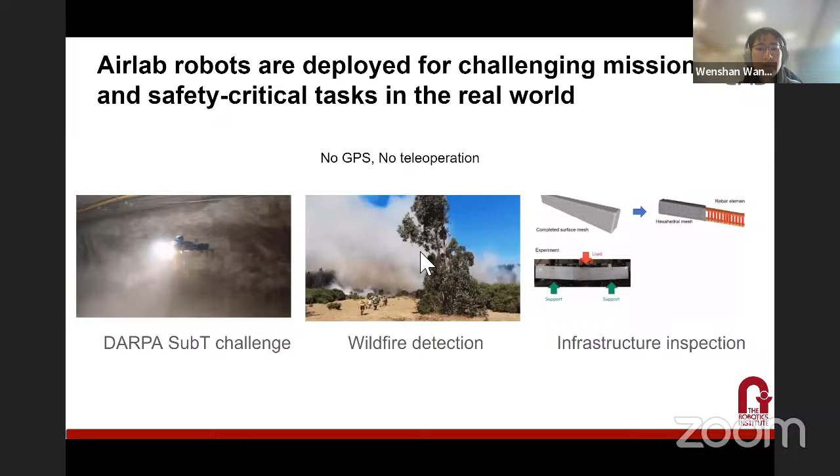We developed field prototypes in very challenging environments without GPS guidance and without teleoperation. These cover different applications like subterranean search and rescue, wildfire detection and prediction, and infrastructure inspection. We often focus on safety-critical tasks in those very challenging environments.

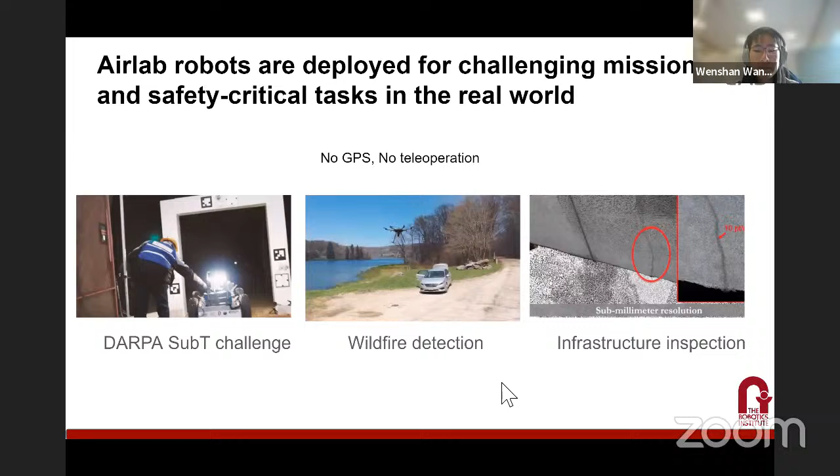So we are very experienced in designing, integrating, and developing robust prototypes for ground and aerial robotics. Here are some platforms we developed and have been working with. You can see there's a lot of diverse robots, like different types and sizes of drones, and ground vehicles also in a variety of sizes.

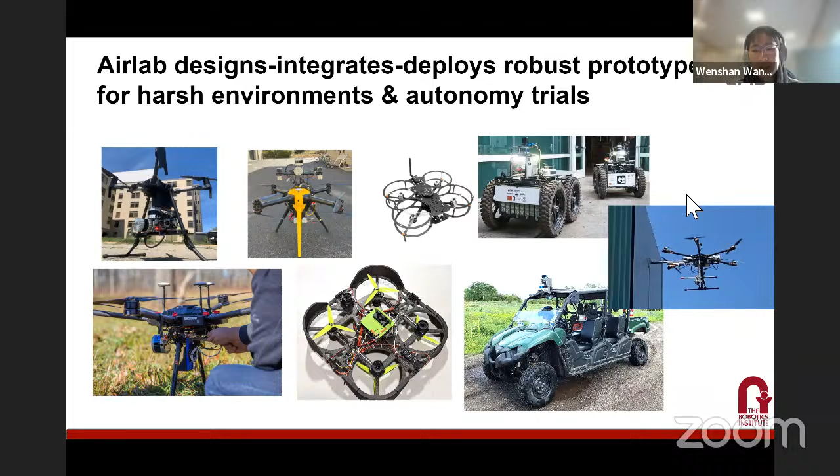We also focus a lot on real world tests, so we have very large testing sites. As shown on the left side is a Gascola testing site, which is a few kilometers in diameter, with off-road settings and all kinds of challenging terrains. We are testing and developing the off-road driving system in this testing site.

On the right side, it's an abandoned hospital environment, which has a combination of indoor and outdoor scenes. We test a lot of drones and legged robots in these environments.

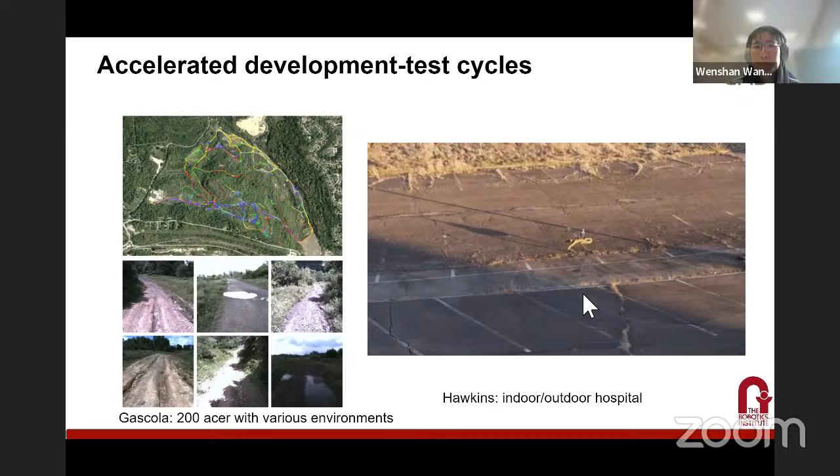Here I highlighted a few projects we are working on. I'll show more videos in the next slides.

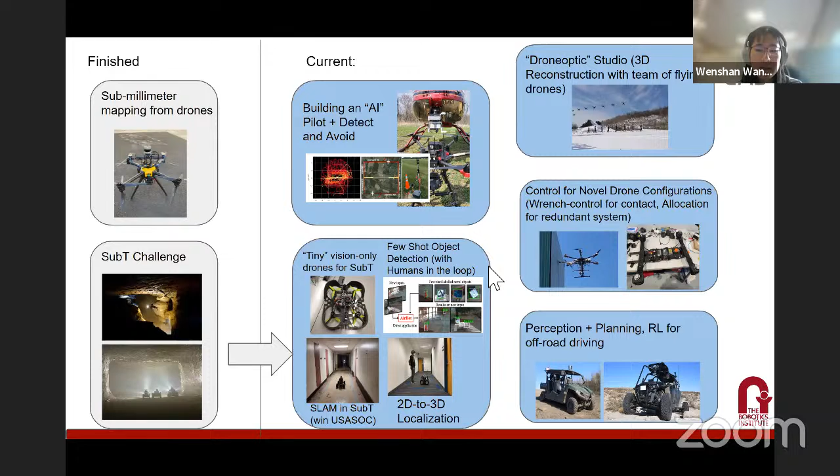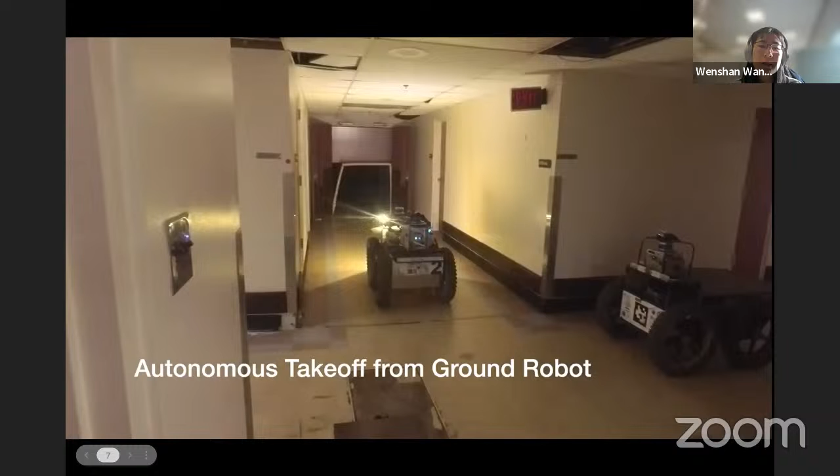Professor Sebastian Scherer led the DARPA SubT challenge a few years ago. Our team Explorer won first and second place in a couple of competitions. Here shows the video of the competition. The goal is to search for a few predefined objects like a human, a cell phone, and a backpack in this complex environment.

We'll send a team of heterogeneous robots - here we have a drone and a ground robot. The drone just takes off from the ground robot and explores the environment collaboratively with the ground robot.

In these environments, it's typically very challenging in terms of perception and planning. Here you see when the drone is flying, it kicks off a lot of dust in the environment, so it's pretty challenging for LiDAR localization or visual localization in this dusty environment.

Also, how to collaborate multiple robots efficiently so they can explore different areas given their own capability is a very challenging problem. For example, we want the drone to explore challenging environments like vertical spaces that cannot be reached by the ground robot.

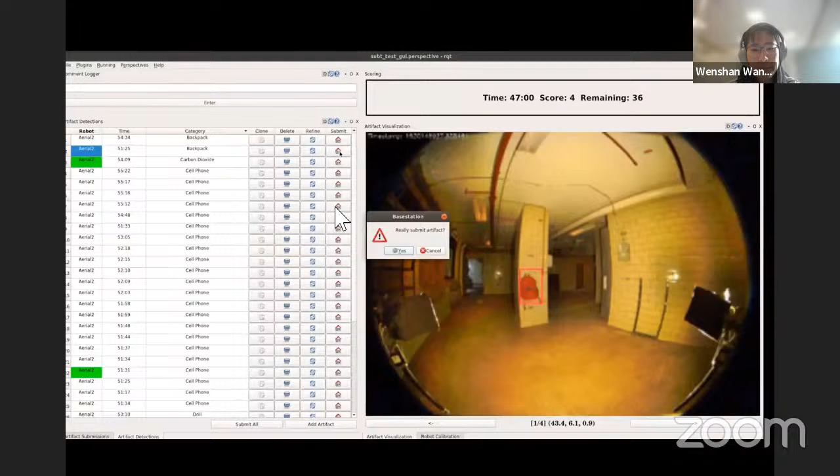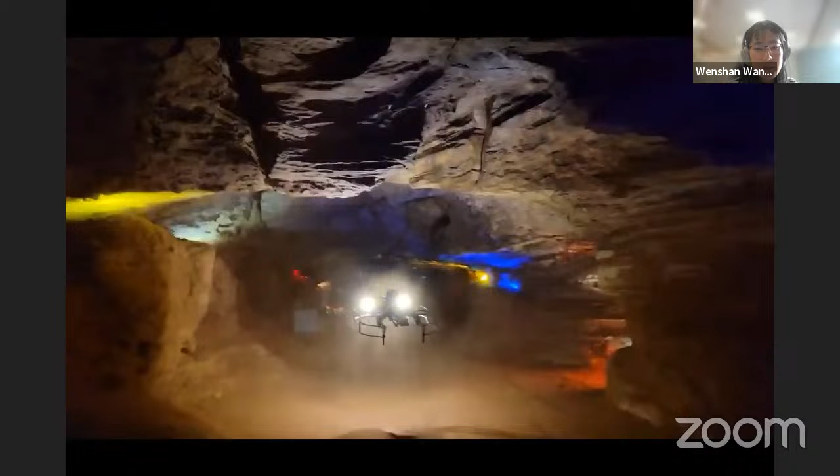So here's another example. This is also sub-T, but in a cave environment. It's a little different than the previous one. The cave has more challenging features. You can see there's a lot of dust here. Also, the shape of the cave is more complex. Some tunnels are more narrow, so it requires better planning techniques as well as more robust state estimation and perception.

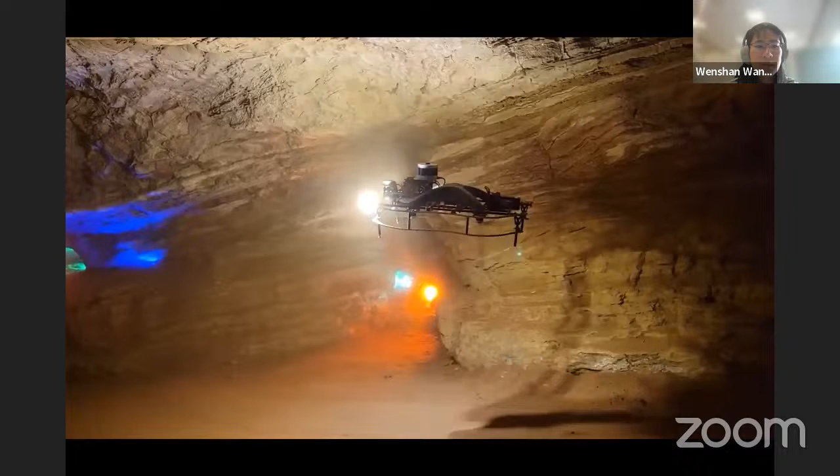So another interesting work we've done is how to use fewer examples to learn how to detect novel objects. Usually, using machine learning, you need a large amount of training samples. You need a human to label hundreds or thousands of images of the same type of object in order to learn a robust detection model.

So here we developed a few-shot detection model. That requires no fine-tuning on the real data. So it can detect the novel object by just showing it with 3 examples.

So it is trained on a large dataset and validated directly on this sub-T dataset, and we can see it performs quite well without any fine-tuning. So in this case, it's very important that a human can just show a few examples of which object you want to find in this environment, so the drone or ground robot can just be deployed to find that object without labeling hundreds and thousands of images.

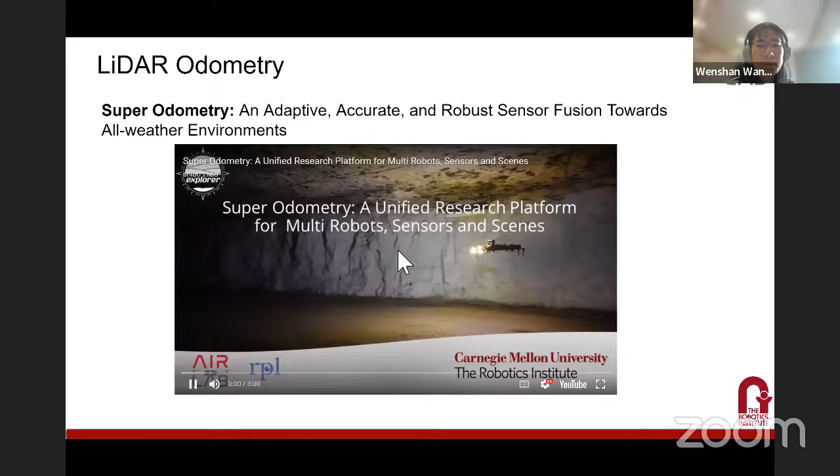So as I just mentioned, in those challenging environments we really need very robust state estimation and SLAM technique. So here I showed the super odometry developed by our lab. It's a multi-modal SLAM framework. It basically combines different sensing modalities. You can see here in this test, the drone is out of control, so it's spinning very fast. But you can see the tracking result of the super odometry still, even in this fast, out-of-control situation, it can still track the trajectory of the robot.

And we also test this pipeline in the smoke environment. The key idea is to take advantage of multiple sensors. For example, LiDAR is generally more accurate in most situations, but when you come to a long corridor, it will have this geometric degradation problem. But vision sensors can compensate for that problem in this long corridor environment. In the smoke environment, both LiDAR and visual sensors will be affected, but we also have a thermal camera on the drone so that it can see through the smoke more reliably.

So we also use the super odometry on this ground vehicle that's driving very fast in this off-road environment.

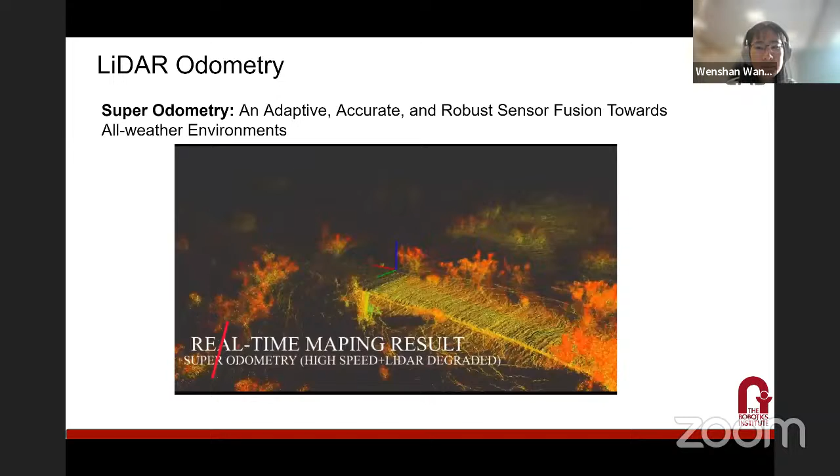Another key idea about the super odometry is that it relies on the IMU sensor to provide a reliable pose estimation. The IMU sensor is measuring the robot's acceleration and angular velocity, so it will not be affected by the environmental degradation. So it can provide relatively robust measurement.

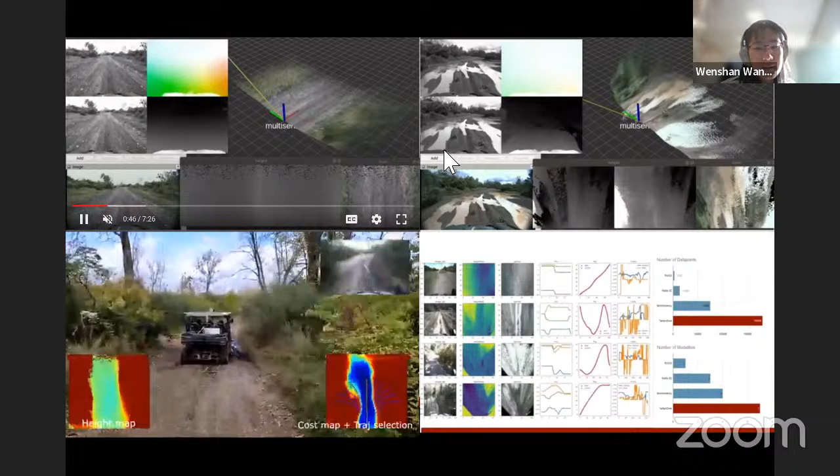So another line of research we have been looking at is vision-based SLAM algorithms. What this means is that we want to move away from the LiDAR sensor, which is very heavy for the drone to carry. Also, the LiDAR emits a lot of signals. In a lot of applications, you want passive sensors like a camera so that you won't be detected by other people. So here, we develop a vision-based state estimation and mapping module that can take a stereo image and estimate the robot trajectory and create a map in real time.

So this shows more examples of the map generated by this one. You can see on the left side is a first-person view image and the depth estimation. On the right side is the 3D reconstruction of the environment. You can see in high detail the types of terrain, the gravels on the terrain. The resolution is also much higher than a typical LiDAR sensor can view.

So here are a few more examples of how the mapping looks. We first build a 3D reconstruction, and for this off-road scenario, we project the map to a bird's eye view so that we can do planning and cost estimation on top of these maps.

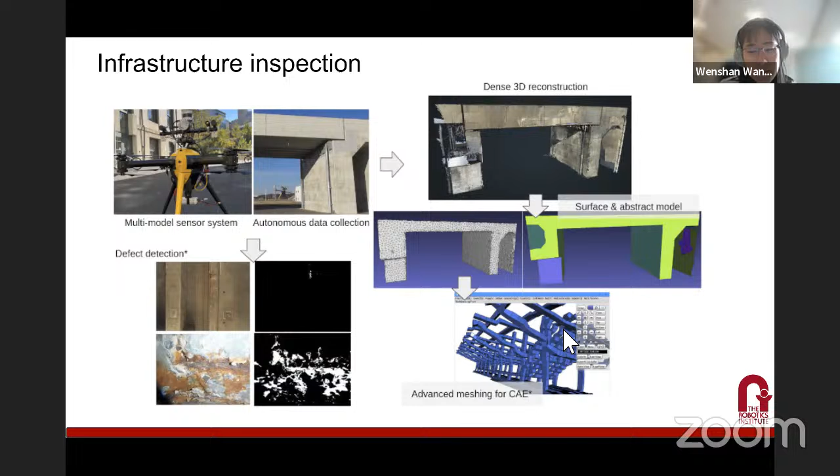This robot can just take off and autonomously take pictures of the infrastructure, and try to recover the mesh and high resolution model so that it can be analyzed with this software to detect any cracks on the infrastructure.

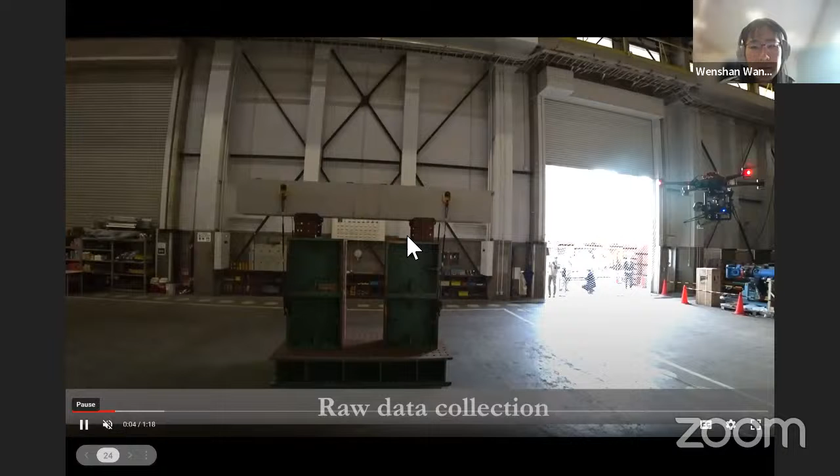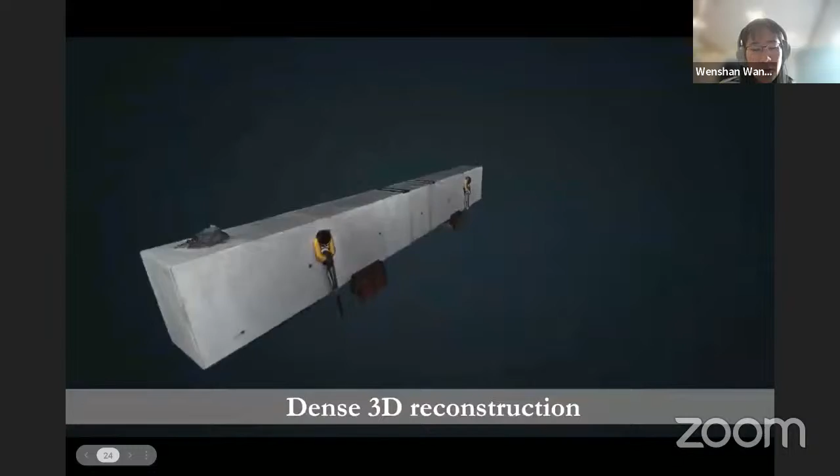Here shows a process of this algorithm. First, the drone will fly autonomously and take high resolution stereo images. It will build a 3D point cloud of the structure along with a high resolution 3D model.

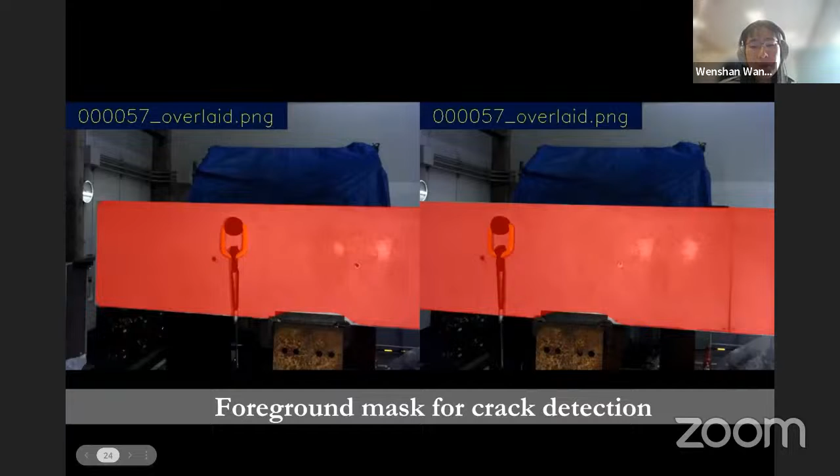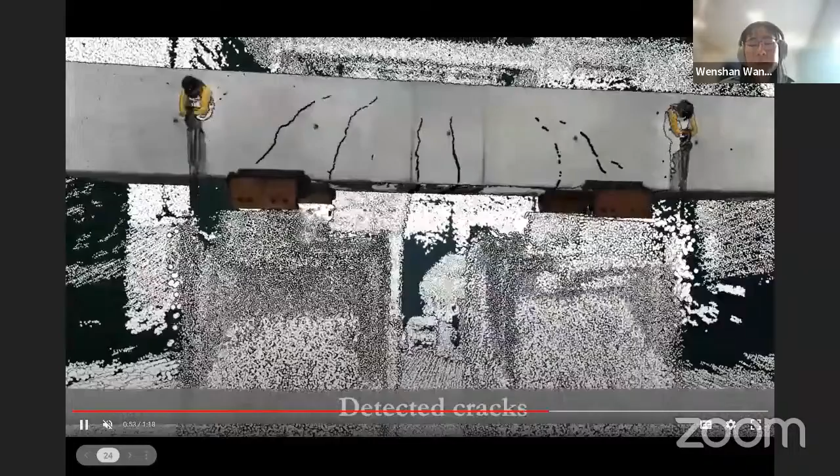It will also recover a mesh and fill the holes if necessary. The reconstructed data can be utilized for inspection purposes because it's in sub-millimeter accuracy. You can detect the cracks and also analyze the force of this structure. You can use it with commercial software like FEM simulation to detect any deficiency in the structure.

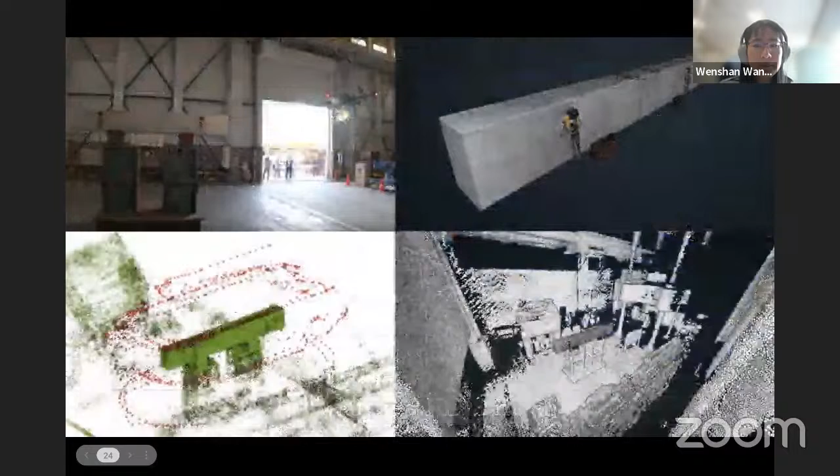Hey, thanks for the awesome talk. We can start the Q&A now. I have a couple of questions. The first one is, thanks for the awesome talk - the lab work seems to be very focused on applications, so I'm curious about how much of the lab work is transferred to the industry. Thank you.

We have a lot of collaboration with industry and military. You're right, the lab is very focused on application because we think the application tells us what the most interesting research problem is. But we also research a lot of interesting and difficult research questions, like how to do more robust state estimation and perception in challenging environments. I think that's a really good combination of research versus application.